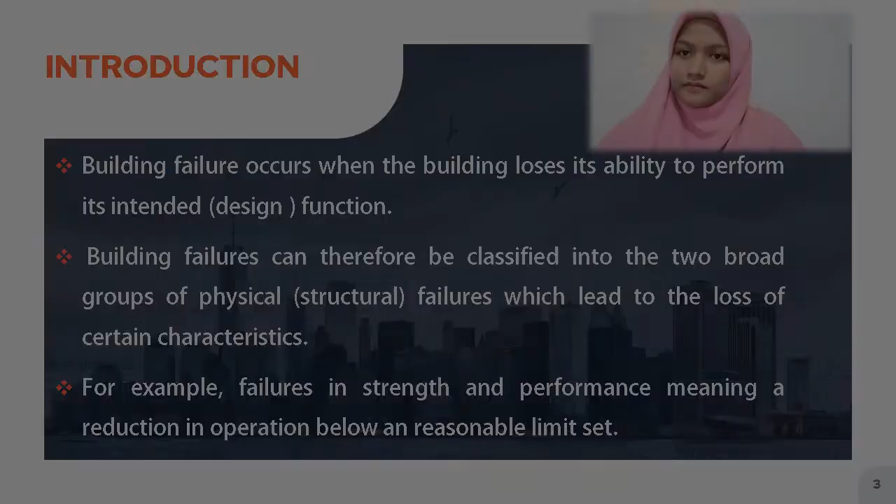Introduction. Building failure occurs when the building loses its ability to perform its intended function. Building failure can therefore be classified into two broad groups: the physical failure, which leads to the loss of the characteristic, for example a strength, and the performance failure, meaning a reduction in the operation below the reasonable limit set. Aim and objective of study.

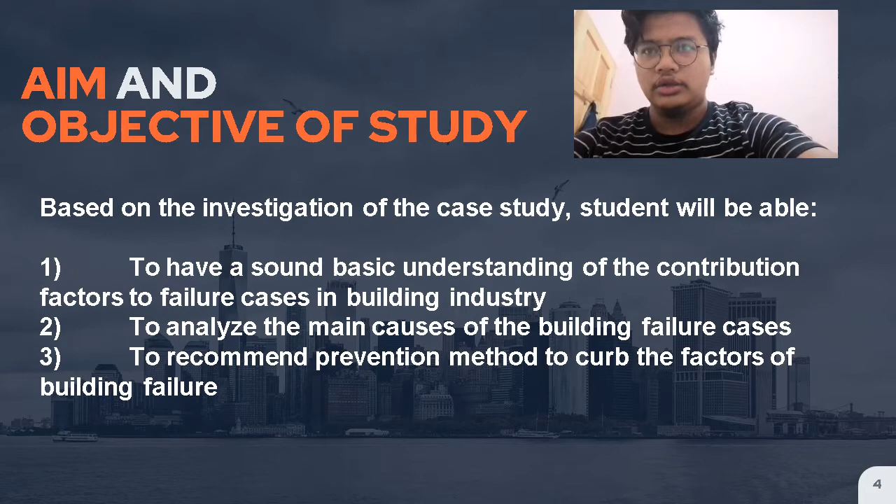Based on the investigation of the case study, students will be able, first, to have a sound basic understanding of the contributing factors to failure cases in industry, to analyze the main cause of the building failure case, and to recommend prevention methods to curb the factors of building failure.

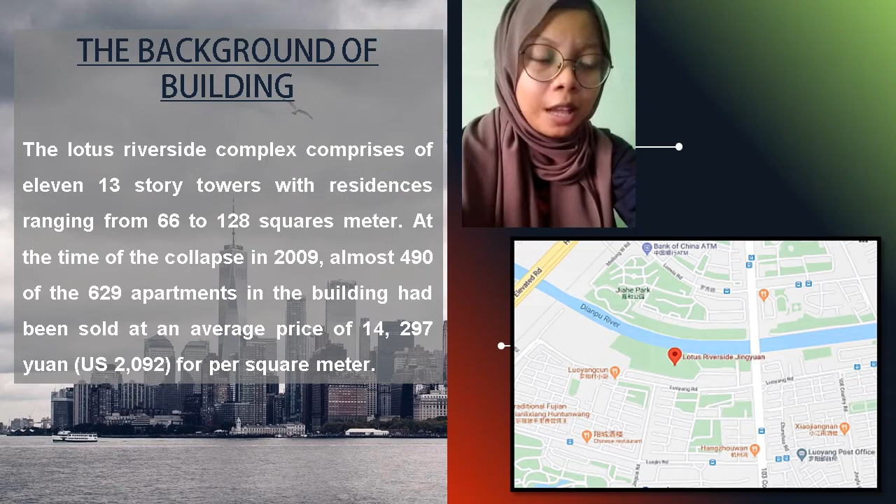My case study is the Lotus Riverside Residential Building, Shanghai, China. This building has 11 13-story towers with residences ranging from 66 to 128 square meters. In 2009, the building collapsed, and 490 of the 629 apartments in the building had been sold. The building collapse was related to excavation during construction of a garage. A large quantity of earth was removed and filled in a landfill, and the weight can cause the river bank to easily collapse. The collapse killed one worker at the construction site.

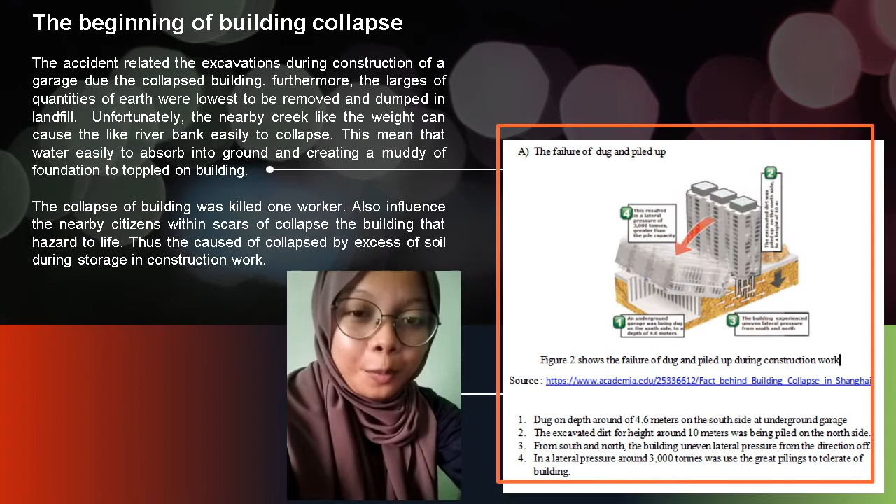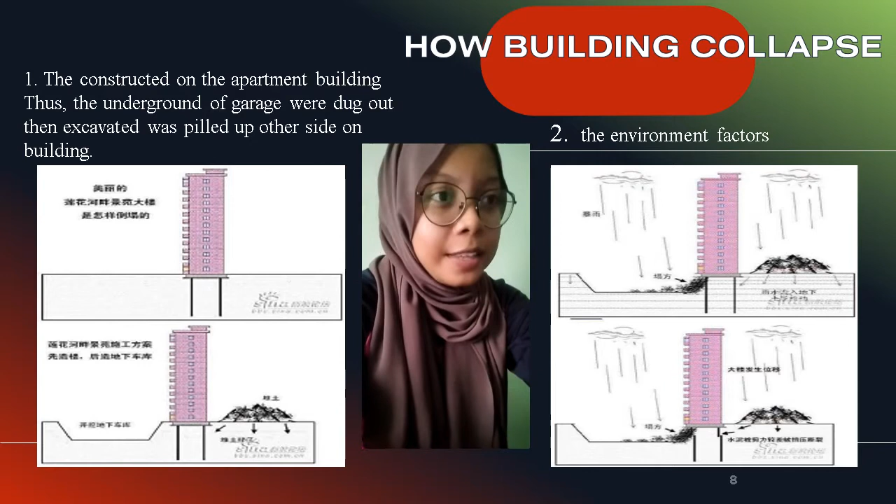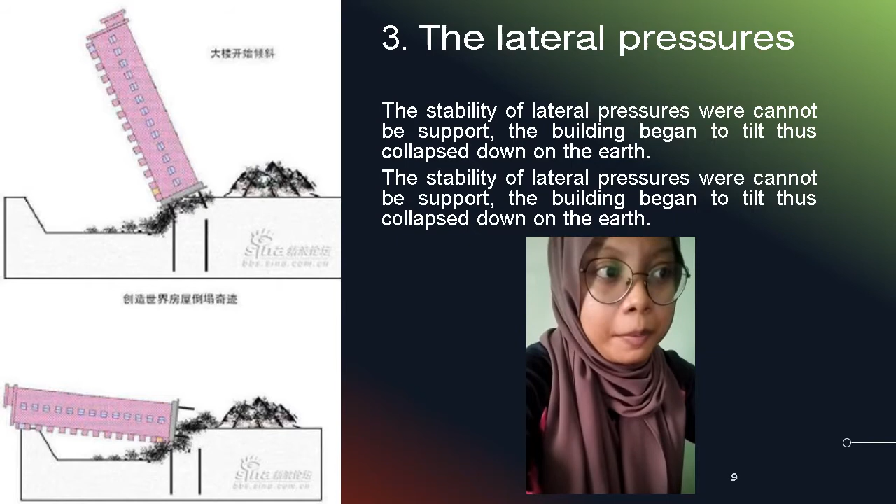How did the building collapse? First, by the constructor of the apartment building: the underground garage was dug up and the excavated soil was piled up. Second, environmental factors, heavy rains and wind. And third, the lateral pressures. The lateral pressure could not be supported and the building began to tilt and then collapsed.

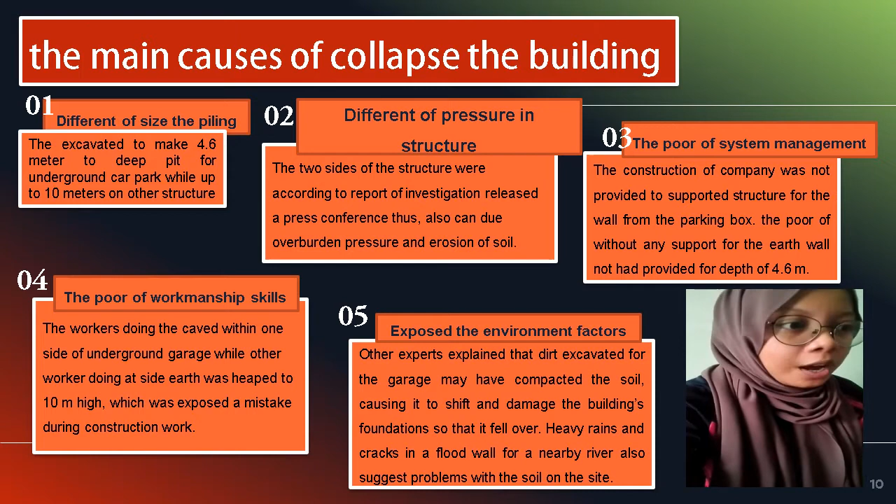The causes of the collapse: first, the difference in size of the piling, 4.6 meters to the underground car park while 10 meters on the structure. Second, exposure to environmental factors, heavy rains and wind. Third, the difference of pressure in the structure, with overburden pressure and erosion of soil. Fourth, poor workmanship skill, with workers digging on one side for the garage while other workers piled earth. And last, poor system management: the construction company did not provide support for the wall structure at the parking box.

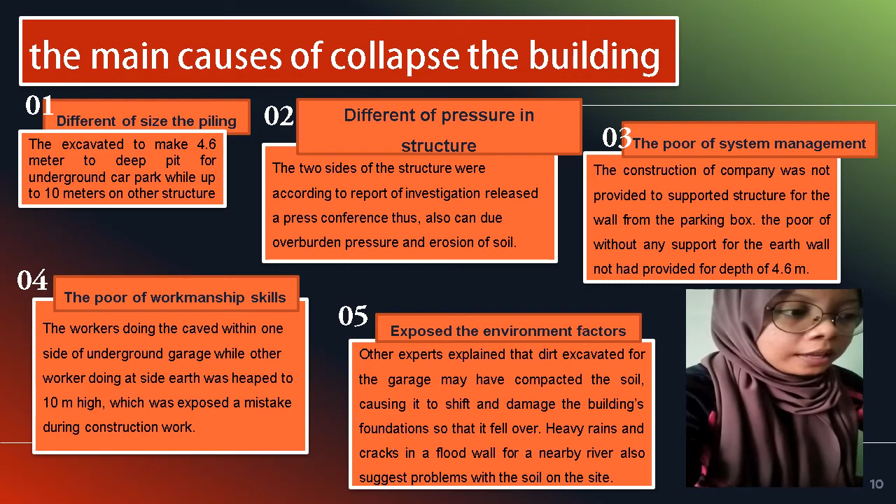Case study number 2, Skyplaza Barrley, building background. Located on Bailey's Crossroads, Virginia. Property type is construction in Bailey's Crossroads in Fairfax County, Virginia. Land title is commercial. Number of stories is 26. Number of blocks is 4. Total number of units is 468, and facilities are apartment, office, hotel, shopping center and parking.

The chronology of the collapse. First, a section of the 24th-floor slab fell on the 23rd-floor slab, starting a collapse that continued all the way to the foundation. 14 workers were killed and 34 injured. The collapse and failure propagated horizontally toward the building's parking garage, killing workers: 10 in the tower and 4 in the garage.

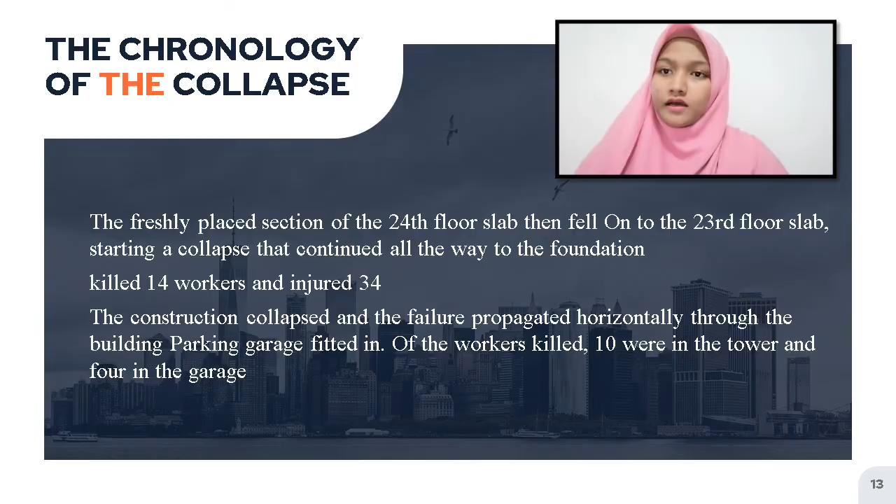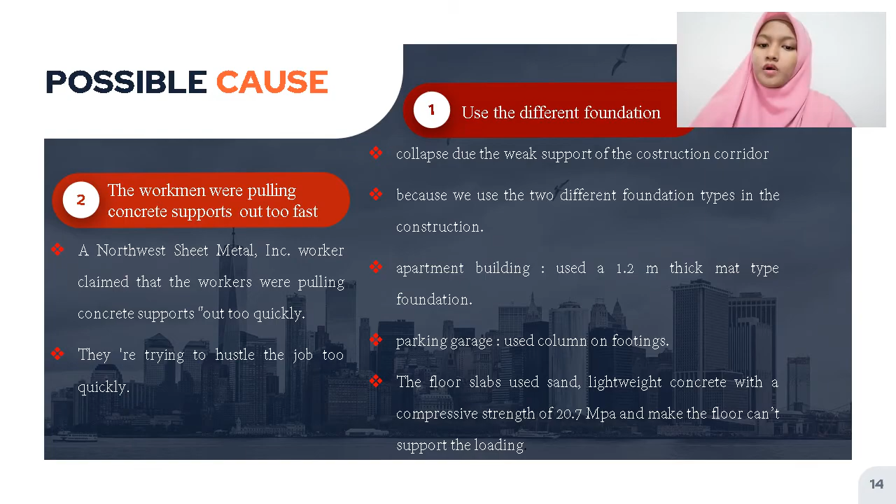There are two possible causes. First is a different foundation and second is that workers were pulling concrete supports out too fast. Conclusion: the incident at Skyplaza Barrley collapsed because workers were pulling concrete supports out too fast. They were trying to hustle the job too fast. This matter was investigated by a professor of civil engineering at the University of Illinois Urbana, hired by Fairfax County, to investigate the causes.

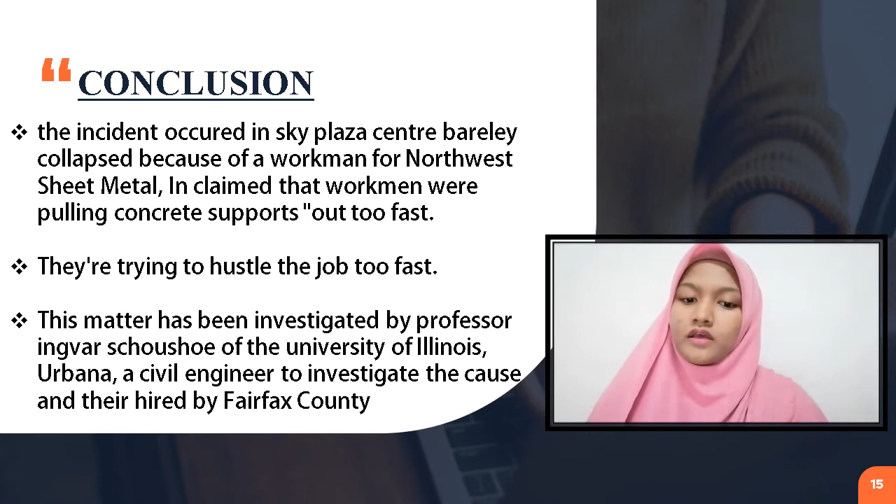My case study is Kota Bharu Mall, Kelantan. It is a strategically located shopping mall on the main road to Kota Bharu city centre and next to KB Bazaar. It opened in 2005. Main tenants are Pacific Hypermarket and Department Store and Pacific Bowling. KB Mall is a 3-story shopping mall complex located in Kota Bharu, Kelantan.

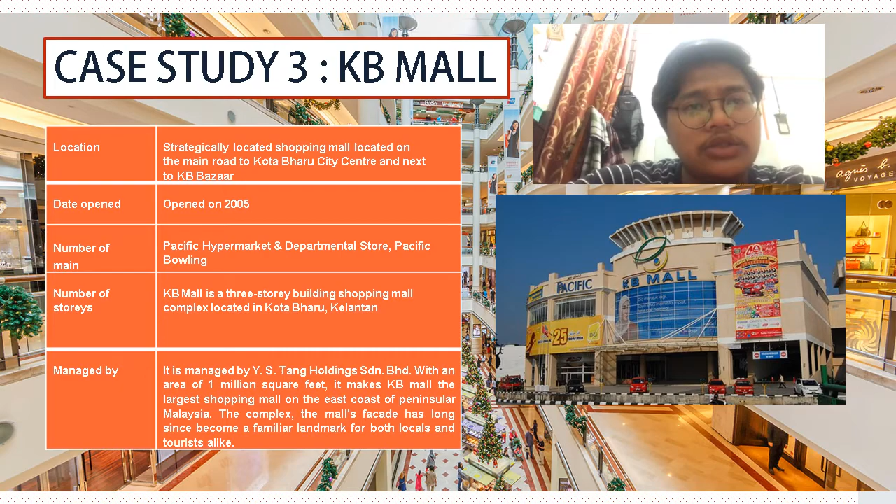It is managed by Y. S. Tang Holdings Sdn Bhd with an area of 1 million square feet. It makes KB Mall the largest shopping mall on the east coast of Peninsular Malaysia. The mall has long since become a familiar landmark for both locals and tourists alike.

Disaster struck on December 6, 2009 at 5 p.m. Kota Bharu residents were shocked by the crash at KB Mall, following a loud crash when the engine of a car driven by Nurul Hidayah suddenly started, causing the car to lunge forward and smash into the retaining wall.

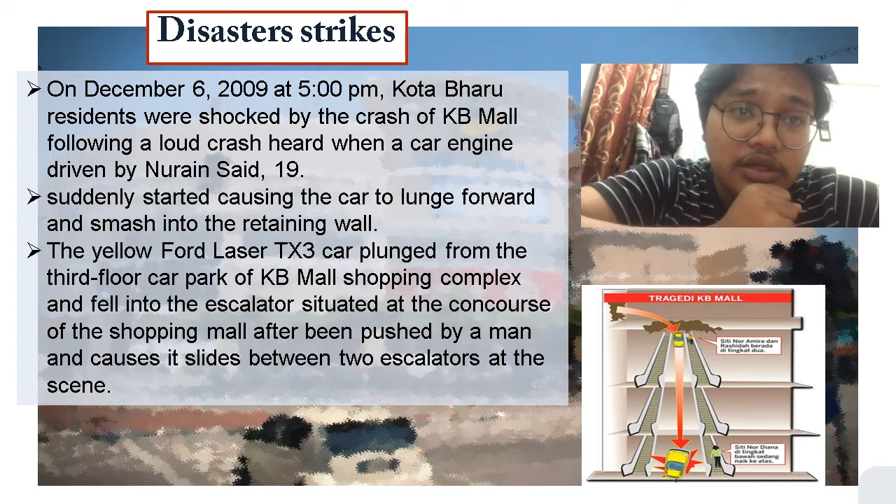The yellow Ford Laser TX3 car plunged from the third floor car park of the KB Mall shopping complex and fell onto the escalator situated at the concourse of the shopping mall after being pushed by the man, causing it to slide between two escalators at the scene.

Statistics of the building collapse. The collapse killed two students from Masterskills College, New Kota Bharu branch, Siti Nor Amira Samsuddin and Siti Nor Diana Azman, 18. It also injured two others, Rashidah, 24, who was also a college student, and Nurain Said, 19. A man who helped push the damaged car was arrested, and the accident also caused considerable damage, as the mall had to close for repair work.

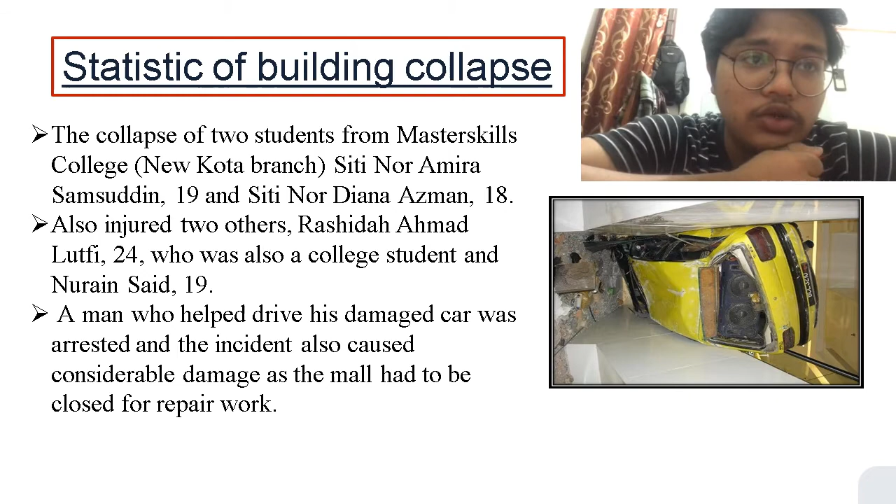Conclusion of case study. The engineer should have done supervision during the construction to make sure that the construction work is following its specification. The engineer or architect must be meticulous in examining the details of the design.

A bad design calculation and detailing of the structure of the property led indirectly to the building collapse, and a design review is recommended to guarantee that the reinforced concrete section size, thickness, and the reinforcement spacing and size support the most critical load combination.

So for the building background of my case study, the official name is Menara UMNO and it is located at 128 Jalan Macalister. It functions as an office and it has 21 stories. The building height is 307 feet. It was built in 1995 and completed in 1998.

The architect responsible for designing this building is T.R. Hamzah and Yeang. The structural engineer is Tahir Wong Sdn Bhd, and the mechanical and electrical engineers are Ranhill Bersekutu and JDC Corporation Sdn Bhd.

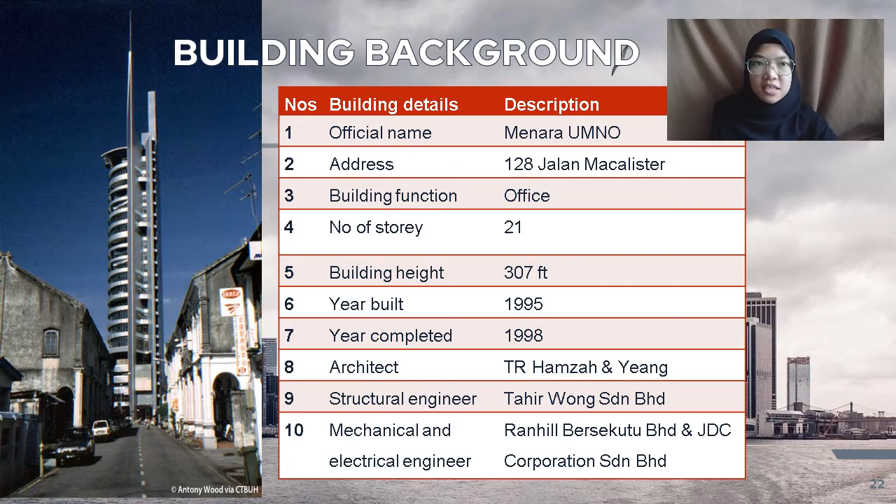The collapse chronology. So, on 13 June 2013, a strong thunderstorm struck Penang, causing havoc to road users in Penang. Because of the thunderstorm, a 200-ton structure from the communication tower atop the UMNO building in Jalan Macalister collapsed and damaged 7 vehicles including a pickup truck at 7 p.m.

It is also noted that the wind was blowing from the direction of 320 degrees, which was perpendicular to the weaker axis of the reinforced concrete fin wall. The impact from the collapse created a 6-meter deep crater on Macalister Road. The collapse killed 2 civilians and injured 7 more.

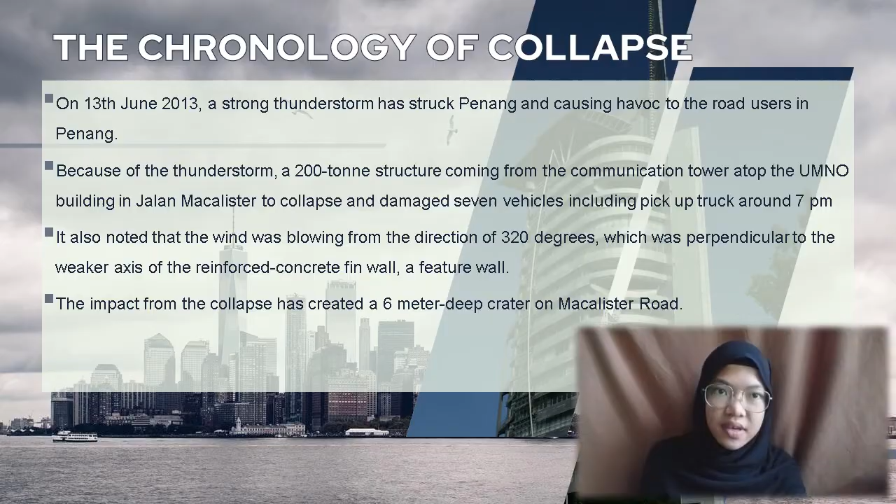Based on my analysis, I have listed 3 main causes of the structural collapse. So, the first cause is design failure. The accident occurred because of the inefficient building design. The architect who designed this building failed to consider the loading from the wind. Wind load is regarded as an important loading element because it has a very great impact on the design of the

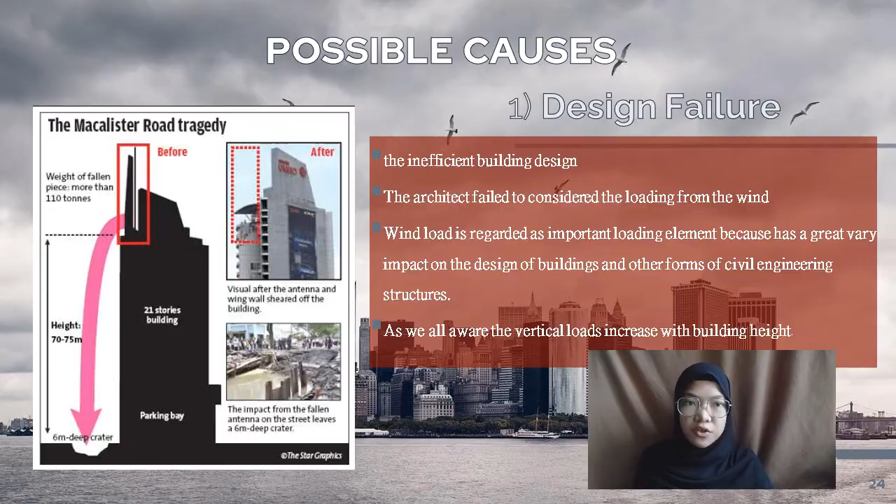building. As we are all aware, the loads increase along with the building height. So, the higher we build the building, the greater the impact of the wind load. The second cause is building design that does not comply with the standard.

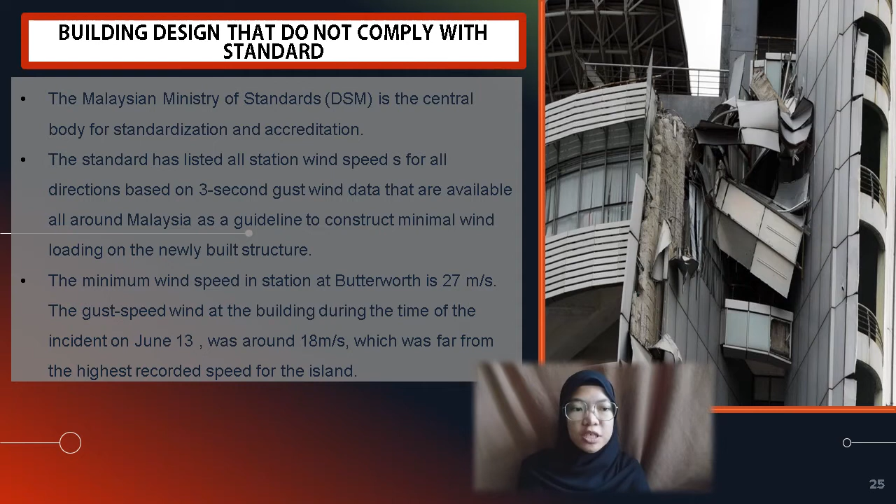The Malaysian Department of Standards is the central body for standardization and accreditation. The standard has listed all station wind speeds for all directions based on 3-second gust wind data available around Malaysia as a guideline to determine minimum wind loading on newly built structures.

The minimum wind speed at the Butterworth station is 27 meters per second. The gust wind speed at the building during the time of the incident on June 13 was around 18 meters per second, which was far from the highest recorded speed for the island.

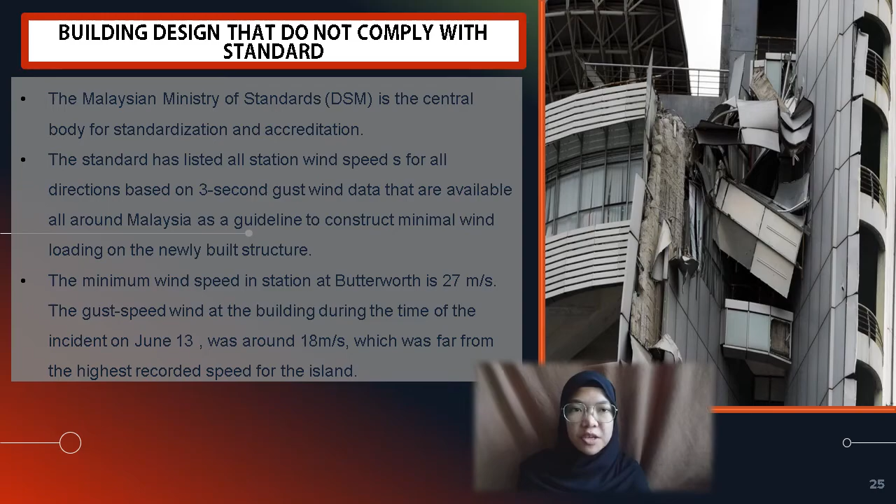The third cause is negligence of the submitting person. The submitting person should check the design thoroughly before approving the design drawing. Any mistake during the design phase should be detected earlier by the submitting engineer. The submitting engineer who approved and submitted the engineering drawings was equally responsible for these accidents.

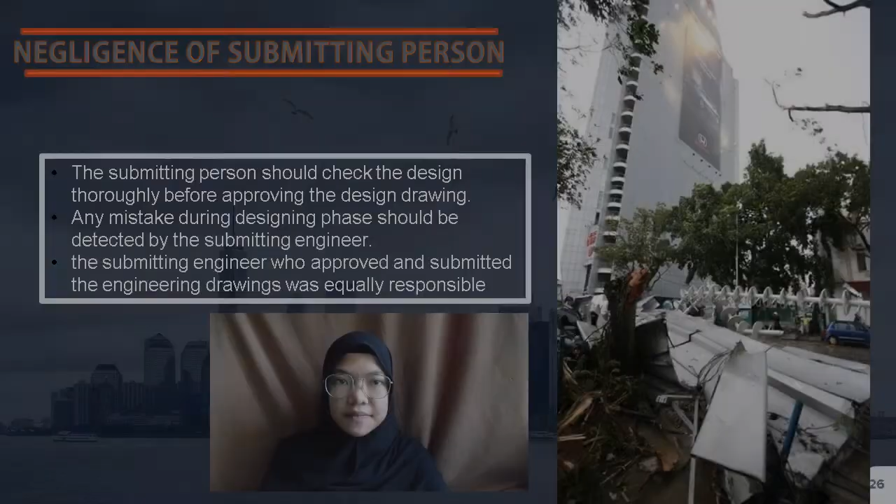As for the conclusion of my case study, during the design phase, the architect must follow all the standards and guidelines listed by the professional board in order to prevent any design failure in the future. The architect also must consider and calculate all the possible loadings imposed on that building. The submitting person also must be aware if the design has any mistake or miscalculation before approving the drawing.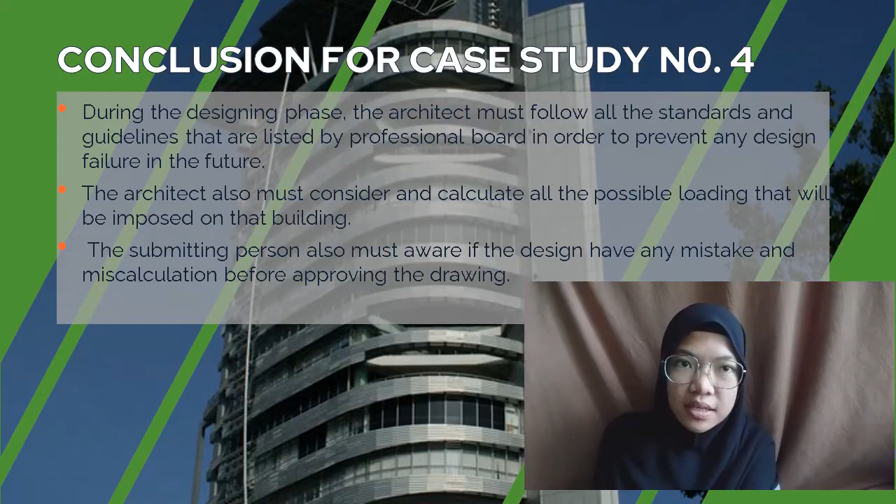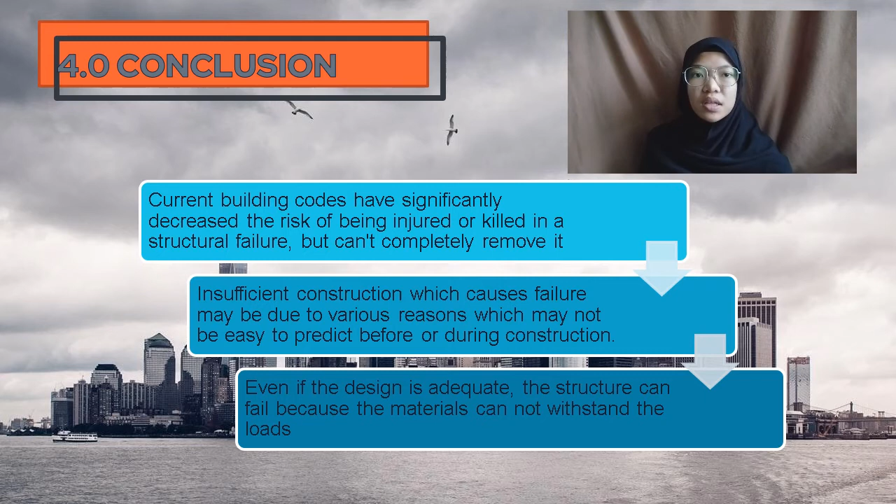The next point is insufficient construction, which causes failure that may be due to various reasons which may not be easy to predict before or during construction. The key causes of structural failure are flawed designs that have not determined the actual loading conditions on the structural component. Even if the design is adequate, the structure can fail because the materials cannot withstand the load. The usage of low quality material will affect the construction.

There are 3 recommendations suggested in order to prevent or minimize accidents caused by building failure. First, all the legal professional bodies involved at every construction phase should monitor and supervise the site meticulously in order to prevent any failure during construction or post-construction.

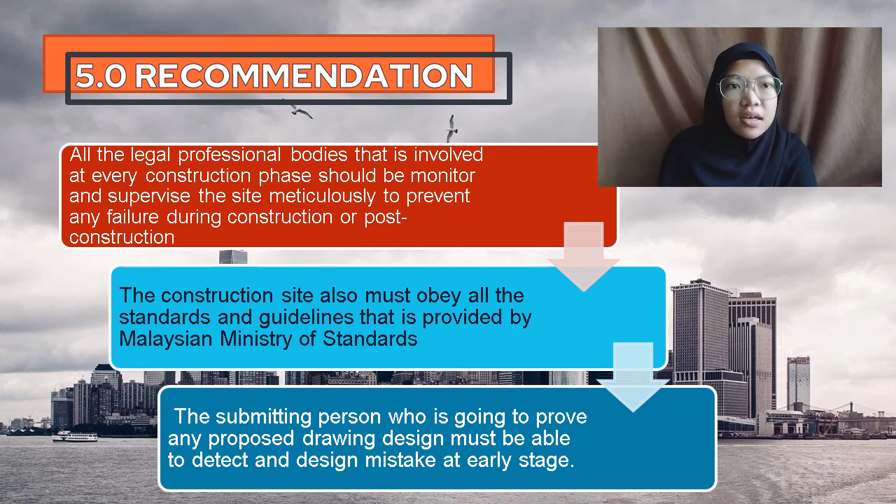Second, the construction site also must obey all the standards and guidelines provided by the Malaysian Ministry of Standards. All construction sites in Malaysia should apply the standards and guidelines. Third, the submitting person who is going to approve any proposed design must be able to detect and solve design mistakes at early stages.